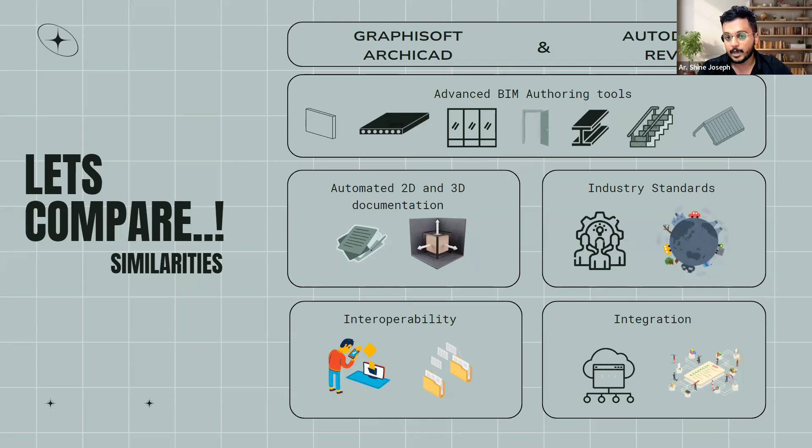Now the main part we have to look at when we select a tool is the differences between them. Now we have two options here: one is Archicad and Revit.

First, we will look at the difference in developer. One is by Graphisoft, that is Archicad. Then there is Revit, which is by Autodesk. Now both tools are actually developed by two different companies in two different locations. Even the purpose would have been different. And if you know, there are some softwares provided by both Graphisoft and Autodesk, so we will know how it functions and how it talks to one another.

In the same way, if you look at another aspect of comparison, Archicad is mainly famous for its user-friendly interface because it is designed by architects. When it comes to Revit, it has a strict way of following, and you have certain methods you have to follow if you are doing modeling within Revit. But it has a composed interface in terms of the technicality.

From an architectural perspective, you might look for something that is very intuitive. Archicad allows you to work on both axonometry and perspective. But with Revit, the main workflow is within an axonometric display when we look at the 3D part. You could still achieve perspective through camera, but it is a longer process. That's why many people chose SketchUp over other software - the ability to move around and inside the model, because perspective view allows you to do that. Archicad also does the same, making it much easier compared to other software.

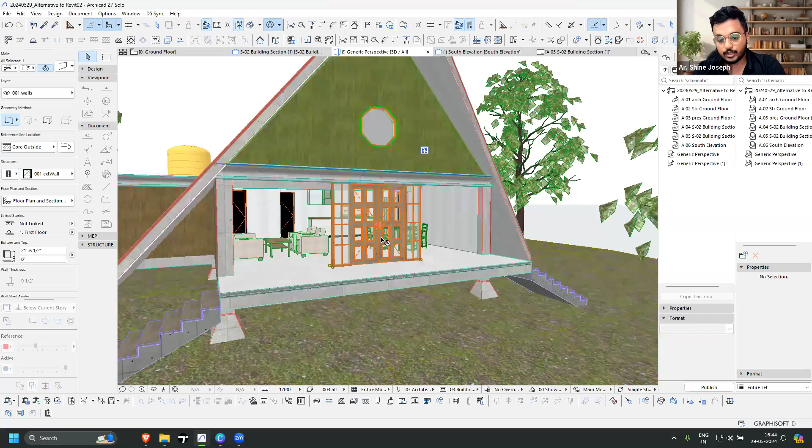Now what I'm going to do is make the front wall, below the beam, using curtain wall tools. We can lift the wall up by changing the base to the first floor so it remains at that level. Now we will build a curtain wall, remove the door, and start fresh from here.

The curtain wall tool in Archicad is a separate tool compared to Revit. Revit works with one single wall component—you have normal walls or stacked walls, and you also work with curtain walls. Here we have a separate tool altogether for curtain wall.

Let's see the settings. There are some categories or hierarchy it comes with. The first is the major settings, or global settings, where you fit the heights and decide what offset you want to build it with. I'm going for a 3.5-inch offset from the home story, considering the floor is going to be that thickness for the floor finish.

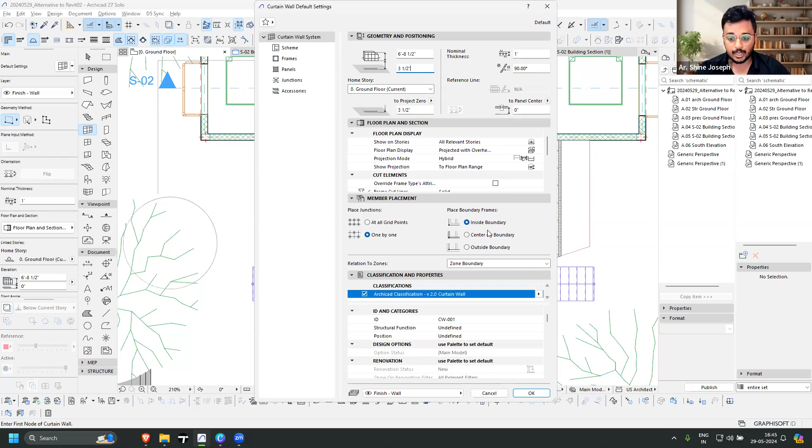There are also additional options, telling which drafting line you want to refer to, and what kind of framing you want to focus on. The most important part here is the scheme. How scheme works in Archicad is that there could be a pattern which can be repeated—that's what a scheme is.

You can create any type of scheme. Right now I'm using a scheme with a 2.5 inch width, and also 6 inches and 8.5 inches height as a pattern I'm creating. This pattern could also be a checkered pattern, a honeycomb pattern, or a random pattern—you could create any pattern you want to repeat. Archicad has that level of detail you can give.

But with software like Revit, it has a strict way of following, which creates a little bit of difficulty in terms of final achievement. So here it's easier when you create these elements. I'll also make sure the pattern is starting from the center—that's something you can customize here if you need any offset or something.

There are multiple options for achieving each element in a curtain wall. The first element is the frames. Frame is categorized into corner frames, boundary frames, mullion frames, and transom. When you click on any of them, it gives you a preview of the element you're looking at, along with the member size, dimensions, or profile you're following.

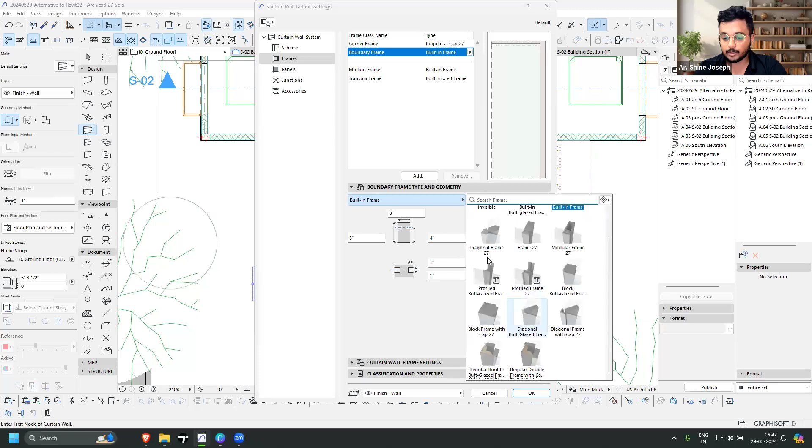Here I'm taking the boundary frame, going for a smaller size, probably 5 inches, with width of 3 inches, and this I'll put at 4 inches. You can see the preview of the member profile changing based on the numbers I'm adjusting. I can also look for different profiles already built in, or completely customize and create one—but this is usually the profile we use.

Now both the mullions I'll follow the same way—I'll go for a smaller size, making it 4 inches and 3 inches here, and control this as well at 2 inches. You can see the moment I change something, it gives you the preview and you'll be able to identify if there are any issues in the model.

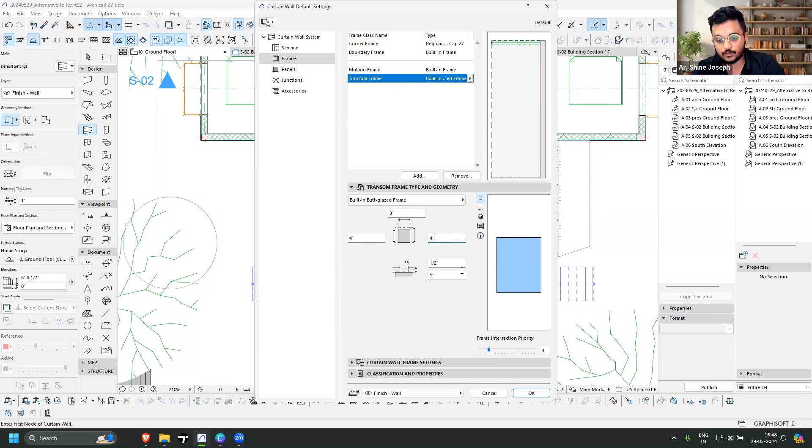I can also work on the transom with the same dimensions—4 inches, 3 inches, and this also I could make 4 inches, depending on what dimension and how it has to join with the rest of the elements. So here we do the setup, then we move to the panel.

So we first did the scheme, then we came to the frames, then we are going to the panel. Right now this panel, if I need it to be glass, I could customize between the main panel and distinct panel, and then I can change. Right now this is the main panel and it is using glass. I could also override the material here and customize a lot of material profiles within this.

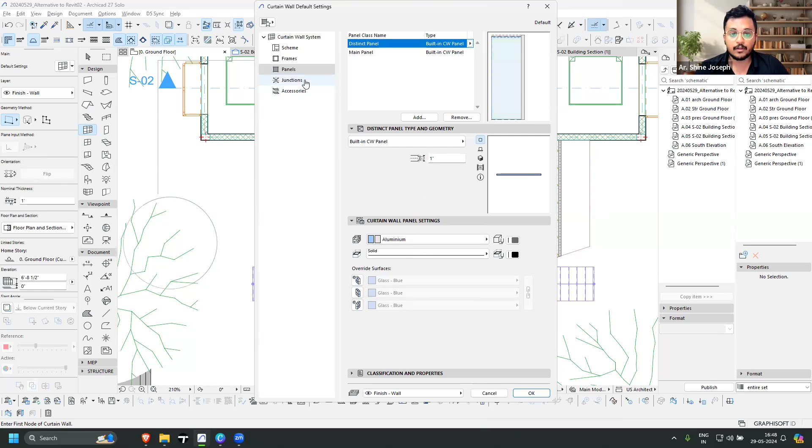We're not going to the junction and accessories. That is something that we can probably see later.

So we will give those properties the same as it is, and we will look at the ground floor and we will draft. Now, when I draft, you can see the preview of how the element is going to be once I do the model. Once I click here, you get the same profile, same panels, and the details.

If I need to have some kind of movement or values to be added, either manually you can do it within Archicad here, or you can adjust the sizes altogether in the main settings. So I just created a curtain wall with the center as the member starting, which I have given in this. And if I get to 3D, you can see the curtain wall has been added.

You could achieve any panel here. That is one of the greater advantages when it comes to working with Archicad.

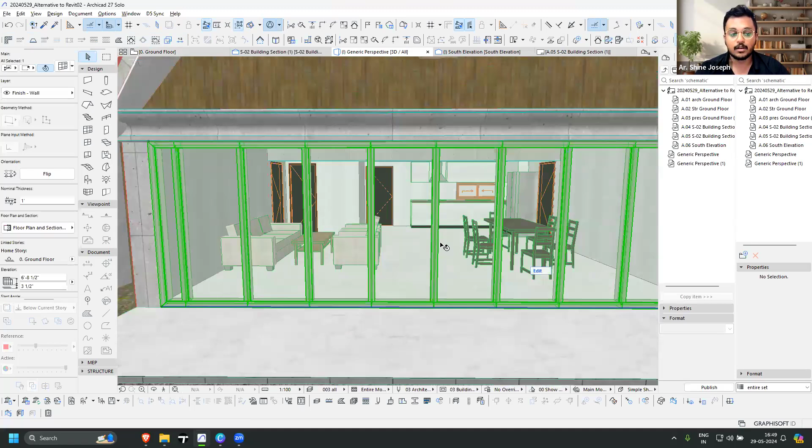Now, if I wanted to edit and customize it globally, if I change, the whole element is going to be affected. But individually means I could just go to the edit mode, which will give you more control. Like if you don't want to see the environment, I can hide them. I can also hide the accessories, junctions, or panels. So all these options are within Archicad for you to work around.

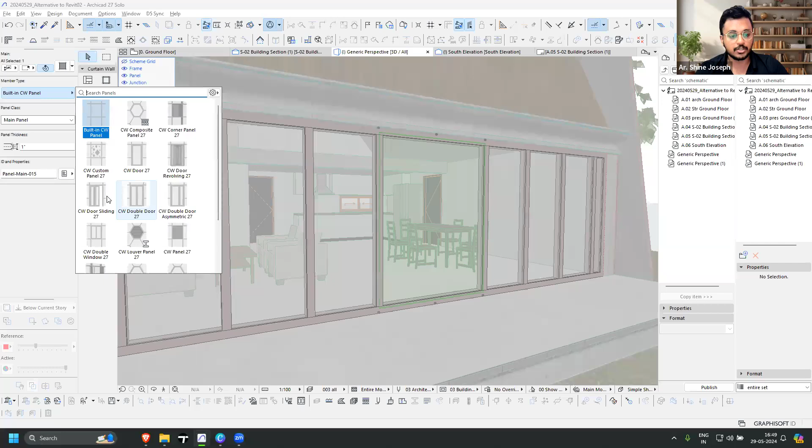So I'll just delete this element and convert this particular slab just by going to the settings and change it to a sliding door. So there are some options here. I'm going for a sliding door, and now you can see just by changing that, the element has become a simple double door. It's not taking any time for me to do any customization. It's all in your hand right away in the interface.

Again, I'm going to the door settings. Within the door setting, there are some options I can work with. I can also customize the panel size and visualize in 3D how it is changing. So if I give it only like a 1 inch thickness, it is going to show how it is going to be. So you could explore some of these things looking into these elements.

And yeah, this is what we have. So I added a door as well. One great advantage is that these elements usually come with certain parametric properties. So here, opening is one of the properties that it has. So I could show in terms of representation that the door could be open within this.

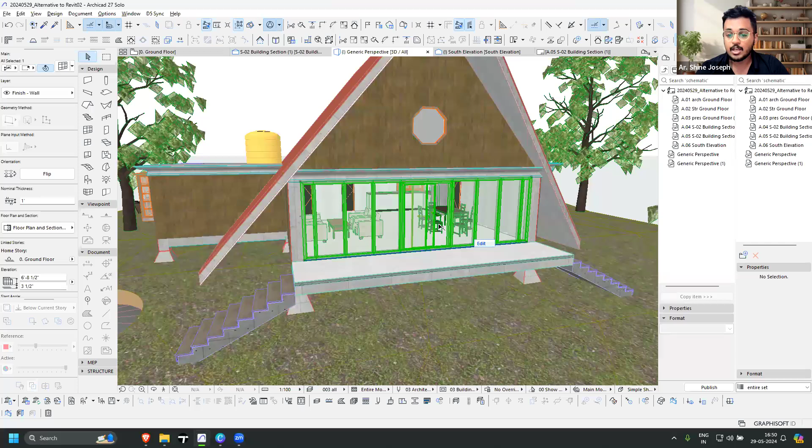So curtain wall in this manner can go to great extent to create any type of thing, not just vertically. You can also have a horizontal element as well. So if I walk in, probably in the upper floor, if I want something like a ceiling pattern, that's what I'm looking at. In that case I could construct a curtain wall with a specific panel, and I can avoid all the members and create something interesting as well.

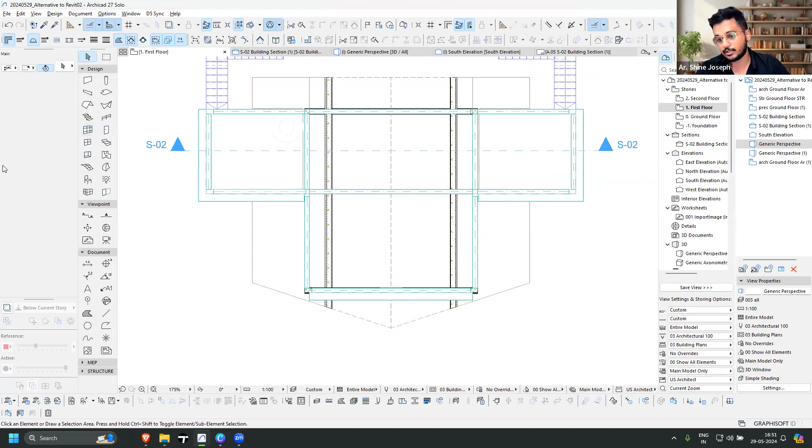So there are so many options that this curtain wall lets you do. Not just this rectangular profile, you can also build it completely to this particular profile as well. So curtain wall gives you complete control, thinking that you are an architect, you should have the freedom of modeling, and the tool is in your hand to create.

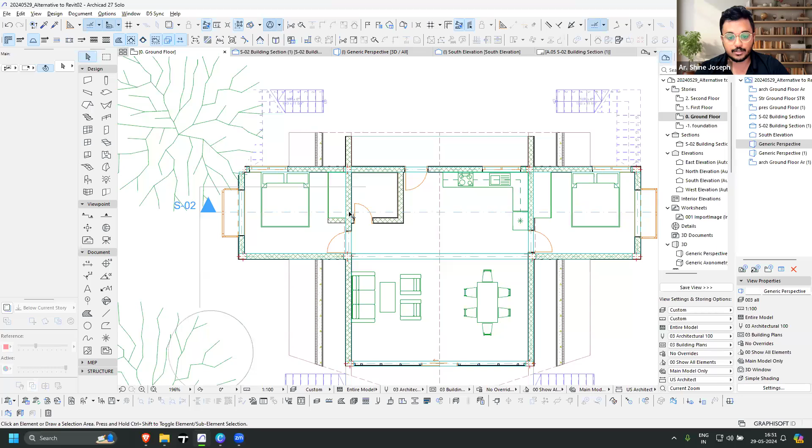Now moving forward, we will look at the MEP part of it, for which what I would showcase is, okay, we are going to do it for this particular toilet, and we are going to put a WC and then take a pipe outside to this particular area.

One of the methods that we have is we could access these MEP tools under the design tools. So there is MEP engineering tools. If you look at, there is ductwork, pipe work, and cabling work. We are looking at pipe work and specifically the pipe route.

I have customized my interface in a way where I have it here under MEP, all the tools that are required. So the first thing is I need to put a WC. So I could use an equipment tool itself to add that. And you can see there are some WCs.

If I want to look at tap or sink, I have all the things already, so I'm going for WC. I'll take this one right now, and then I can specify the element that I'm looking at. This is a 3D preview to be floor mounted or wall mounted, so I can change those details.

Also, the effluent right now is in the back. If I want it on the floor, I can just change this, and that property is going to be updated in the 3D. You can also work on the systems and all these details within here.

Moving forward, all the MEP elements will have a section separately for connections. Right now there is a water connection using a 1.5 inch pipe. For a wastewater connection, that is right now 4.5 inch. If I wanted to change that, I can directly change it here and then continue the modeling later.

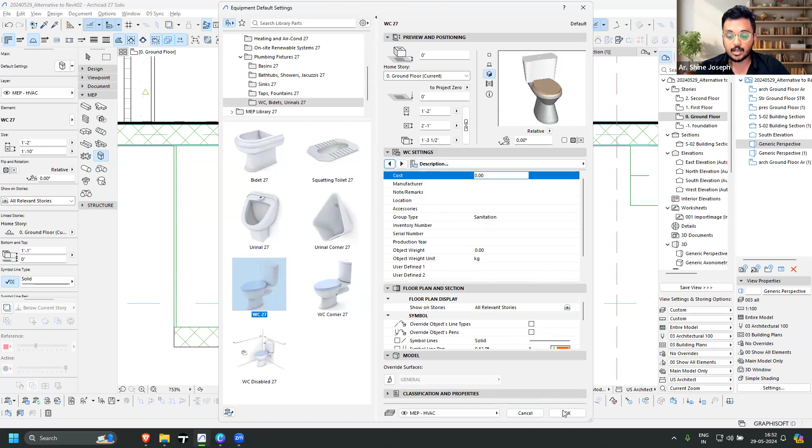So I will keep the settings how it is, and then I will place it to the center of this, and I could also just move it in a bit and place it. It's up to us how we want to do the modeling and what technicalities are required. The pipe you are seeing is the inlet pipe that you will be able to work on. Let's see it in 3D, but I wanted to just focus on this.

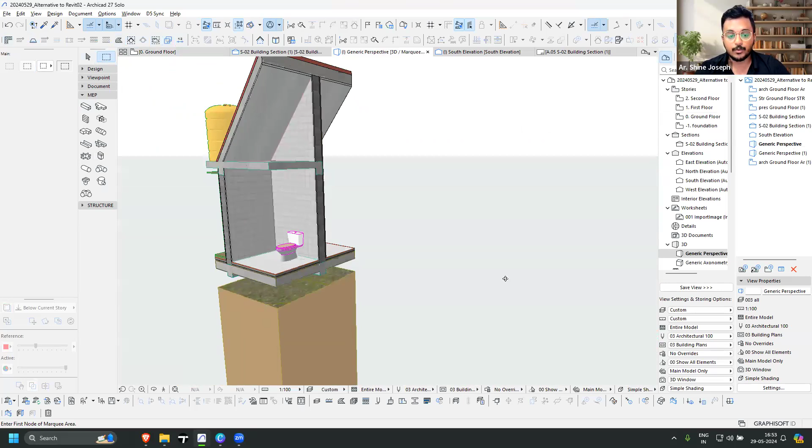One of the tools Archicad has that is really powerful is the marquee tool. If I just take a typical section like this, and then put F5, that shows 3D, it is going to give me a cut section throughout the model, which could be used even for presentation as well. So we have this.

You can visualize it much better. Let's say this particular slab, I don't want to hide it, I want it in terms of layered or wireframe mode. So you could go for the layer settings, which is already there in Archicad. You can assign elements to some of the layers, and you can also create layers and layer combinations. I'm going to change the slab to be wireframe, just by clicking once, and it's going to change all the slab to be in wireframe mode.

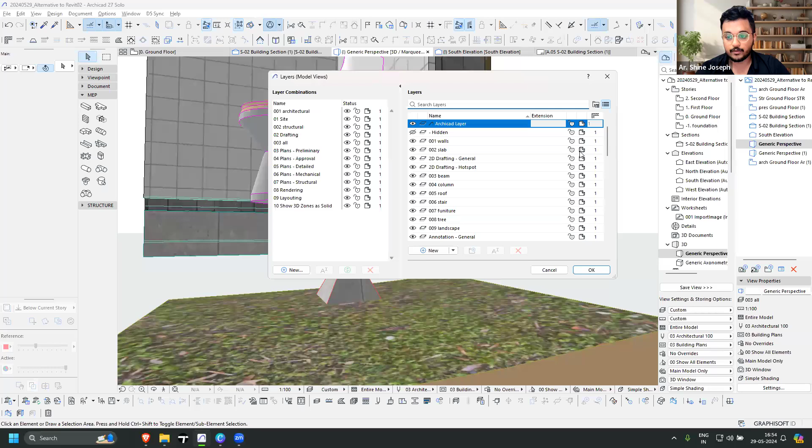Now you can see this pipe which is coming out. I could just stretch it as well and build it till right below the beam that we have. If I want, I can get back to our main element and keep the wall as wireframe, and the slab I can change back. Now you'll see all the walls to be in wireframe mode. So yeah, you could do a lot of changes here as well.

So this is the pipe that is getting the water into this. I could also extend that outside and do it. There are so many options that it lets you work with in the initial part of it. Now moving towards the pipe work, when we work with MEP, there are certain systems that we have to build.

So these systems, let me just open the MEP systems. You can see there is a system for black water, cabling, cold water supply, cooling, exhaust air. All these things you're seeing right now are different MEP systems. If you notice black water, I have already created a system here.

You can just click new and set the property, and assign it to any specific thing. If you wanted to use that system for duct work, you can activate it here, or for pipe work. So I'm giving it for pipe work. And if you also notice, there is an option to customize the fill.

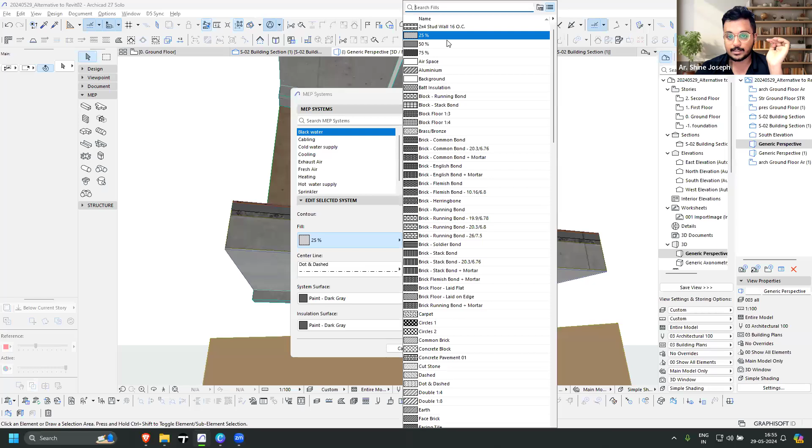This is mainly for how you want it to be visualized in your drawings, and you can customize the line type and also what color you want to use. And when it comes to 3D, you can custom create a specific texture to showcase all the pipes in that color. Not necessary, but it would be good for identifying or separating them in your model.

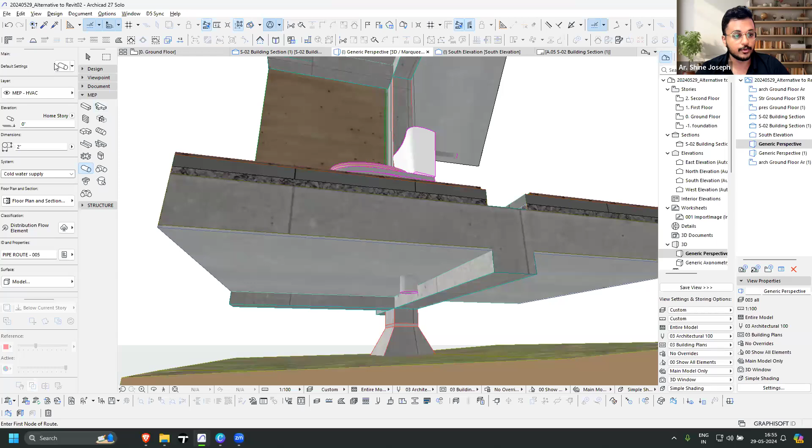So once the settings are done, what I will be doing is take the tool, that is the pipe route tool that I'm using. I can go to the setting and assign them to the right layer. I'm going to keep it to plumbing, considering that is what I want. The system right now is using cold water supply; I could change that to black water, and go to the segment. Right now we are going for a 4-inch pipe for the exit, so you can customize it completely here.

If I go to pipe settings, I could remove the insulation on the pipe. I can also work on some of the other properties. This is something you can explore in terms of nodes, where the creation of junctions happens. Right now I'm working on this pipe bend. I could remove the insulation and work on the dimensions and all these aspects. So you have a lot of parametric properties built into this.

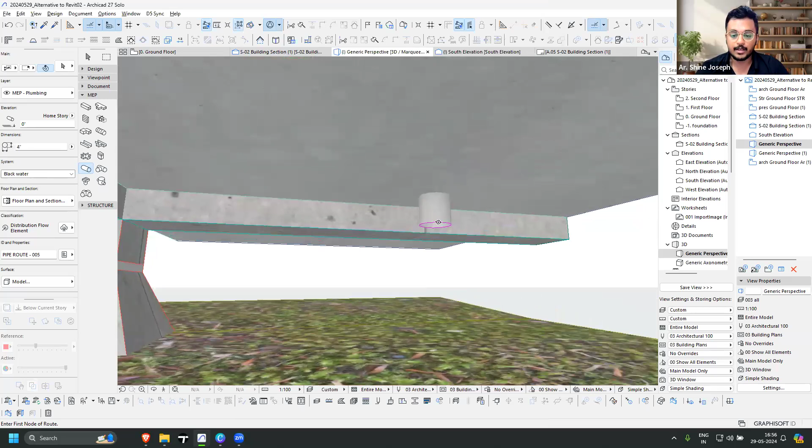Once these properties are set, we just click OK and start the pipe work. Just like how we do a normal typical drafting, we are going to do the same thing in 3D. The moment I come close to this pipe, it is going to snap, and now I can do the model. So I'm just making a pipe straight down, and let's say I go in this direction, and I'll click the same point again. You will be able to see I created this pipe work.

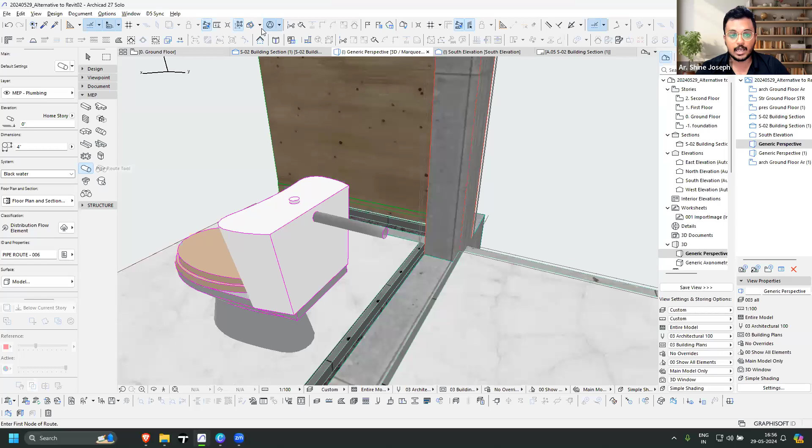In the same way, if I wanted to do it from here, I would go to the pipe work again and change the main settings. Instead, I could just take cold water supply and then customize the pipe dimension here. You can also change the dimension separately, which I'll show you right after this. So I'm just going for 2-inch, and let's see. You can see right now the pipe is coming here, and I need to go up.

I could just snap in 3D as well, or preferably you could work on 2D also. So I'll just move straight up, and I'll stop it here. You can see this one, because we are using cold water supply, specifically that color has been given, and for black water I have given this color.

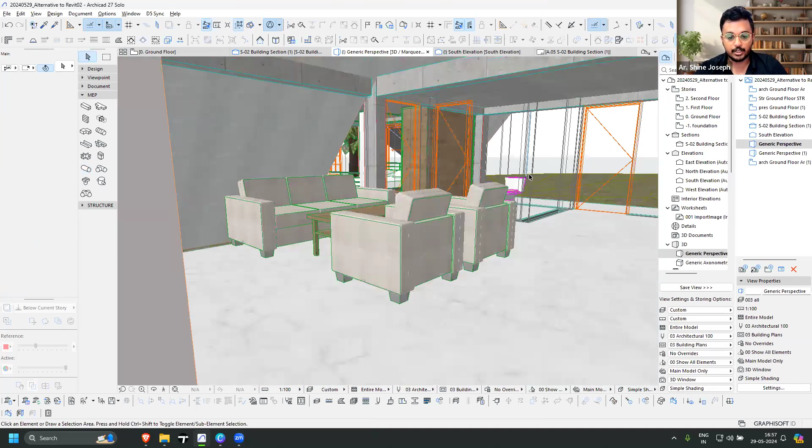So that's how easy it is to create 3D documentation here. Let me just visualize everything, and now we have this. The pipework that you're seeing is actually here behind the wall. If I come back to plan, I will see what is made visible to that element. If I go to one floor below the foundation part, I'll be able to see this.

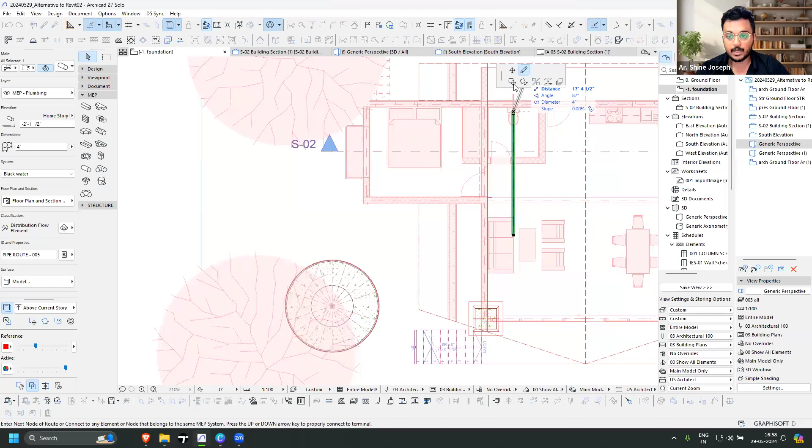Let me turn on the trace reference, visualizing the floor above, so now you can see what is happening above as well. Now I could do adjustment by moving this around. Let's say I want to continue that pipe till here, I could do that. Or if it has to be straight till here, and I want to take a turn, I could just continue the construction by clicking in the pet palette, and it will give you even these junctions.

If some other pipeline is coming from the kitchen, for example, I could just start a pipe and then come close to this point. It will detect the pipe, considering this is where it is joining. I can just click on that, and it will give you even the junction of those things.

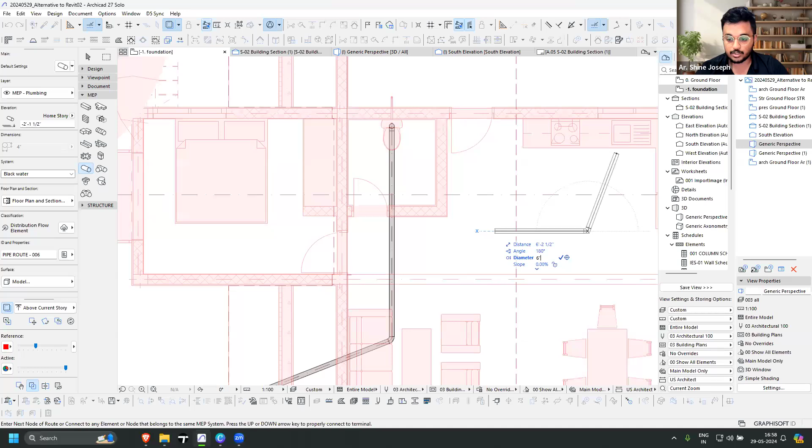If you want to change the pipe size, while doing it, I just change it in the context from 4 inches, if I go to 6 inches here, just to showcase, you can see the pipe and the junctions also updated according to that. So the work will be done by the system depending on what details you are giving to it.

There are also additional options like pipe accessory tools to work along with that. So if you want to add a check valve or butterfly valve, any type of valve we need, we could add it here. You can also import any other file types. For example, if you have a Revit MEP element, you can import it into this library and use it. That makes the workflow really easier if you are working towards an MEP modeling part.

So yeah, that's about the MEP part. I think the MEP part is clear. If you have any doubt, you can ask in the chat. We will move to the next part, that will be the structure.

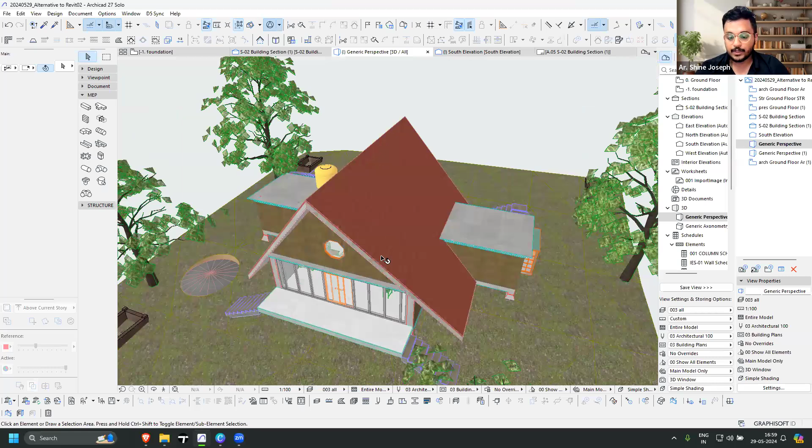If you noticed in the previous session, let me just get back the main model. We have given certain properties such as whether an element is load bearing or not. So for roofs, we have given, for walls, we have given it as non-load bearing. For columns, we gave it load bearing.

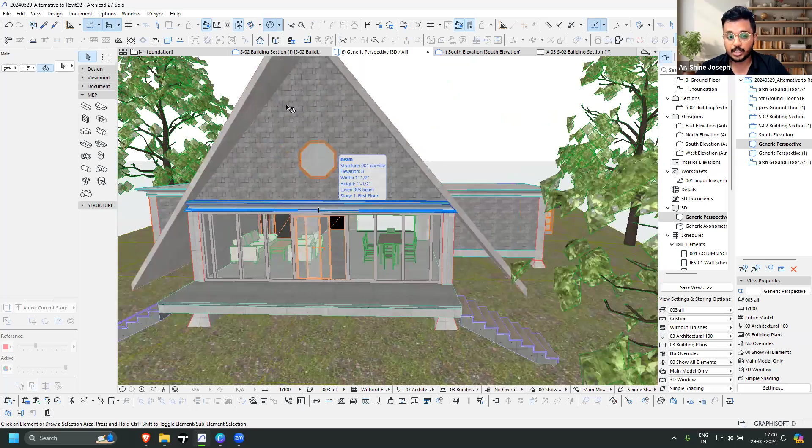So these properties are already given to the system, and once it is given, it is just a click away. Here under partial structure display, I could go through these options. Let me just go to without finish. You can see the layer that defines the finish layer is completely removed, and I'm seeing the main part of the structure.

If I go to the next thing, that is core only - the core part of the modeling model that I will be able to see. Next part, core of load bearing.

This is specifically the structural aspect, where now within the same model, I can visualize all the elements that are load bearing within the project, and on top of that, these are the core of these elements. So you'll be able to see all the beams, the slab, the roof structure that we added, also this slab and this column, the specific column that we designed. We will also be seeing the MEP because that is made part of this.

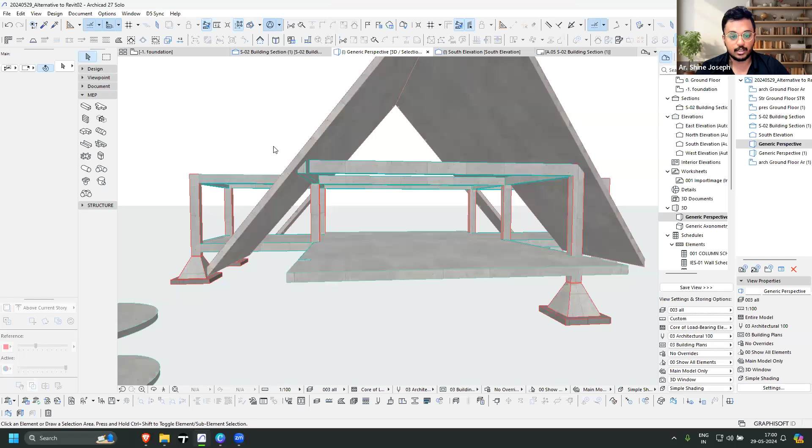If it is not required, you could hide it as well. So you can do hide selection that will remove it. So here I actually hid this element, let me get back. Hide selection - yeah. So this is just a structure display where you can have the primary conversation with your structural engineer directly from here by hiding all the unnecessary elements.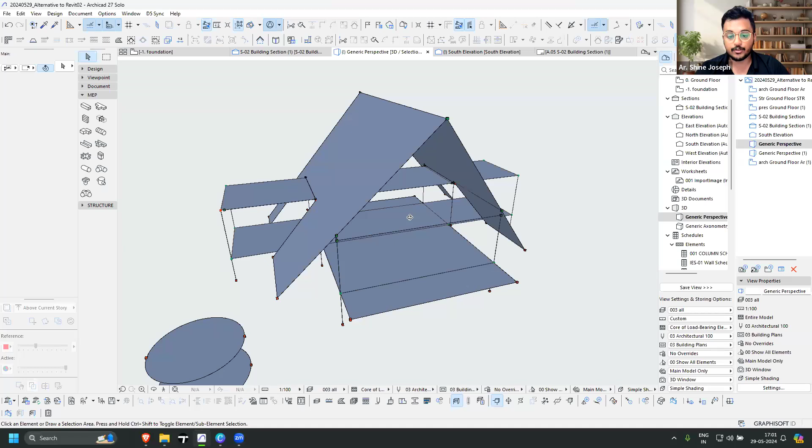But the next step would be visualizing it very close to how a structural engineer would approach. That is an option here called structural analytical model. Once it is active, it is going to showcase to you in terms of how a structural engineer would see. So you can see there is a red color and there is a green color. These green nodes, I can also work on the appearance of that by just turning on and turning off. Whatever is green are connected properly, and whatever is red are either cantilevering or not connected. And you can see some of the properties that are already here.

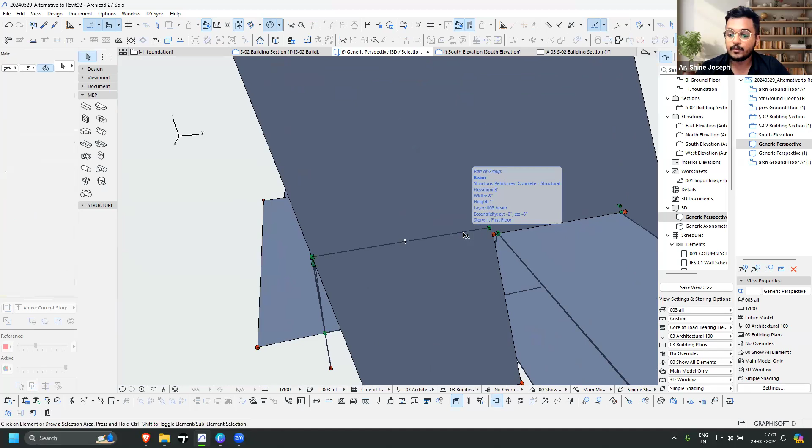So this kind of visuals, we will get even before sending the drawing to a structural engineer. So from an architect's perspective - okay, this junction right now is not a proper junction, it needs attention. This particular thing is telling me that, and it is cantilevering the beam going on in this place. So this information you are already getting in the model, so that before even you take a decision, you will be able to completely customize and make it a better model, then give it to the person to do the analysis. Again, there is one more step that you could do here.

Archicad has this option of creating this load mapping where you could have different types of uses and you can assign it to the zones. That is one. You can also create load cases. So right now there are some load cases here which can be used on applying it on top of any model. Or we have a structural tool, just like I mentioned before - we have structural engineering tools under structure which can be taken into our interface as well.

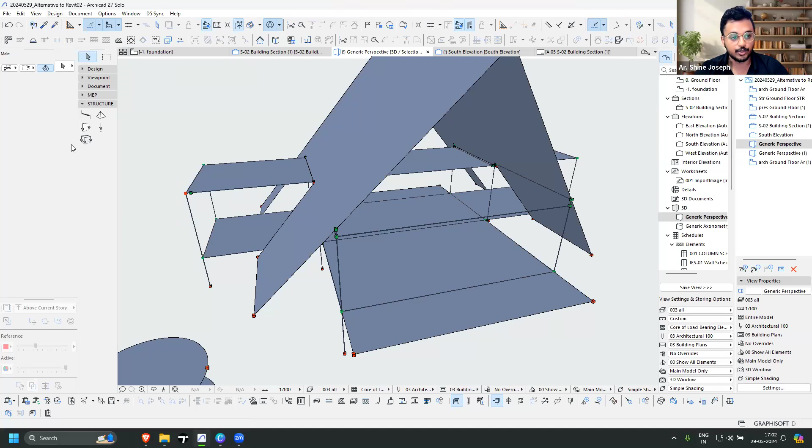So for example, let's say this is the horizontal element, we usually apply it as a planar load. So we could take this structural surface load, then go to the setting, take the load case that you are looking at. So I could use a dead load here, and then I can work on the load value. I'm not a structural engineer, so I'm not really familiar with most of the terms here, but I think this is clear enough to tell you how it works.

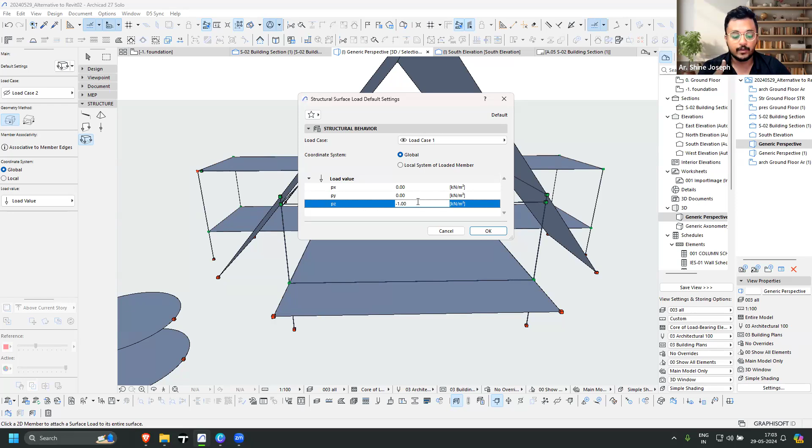And once, if you are a structural engineer and if you are using these properties on this, these elements will carry these properties before you put it into the 3D software. So you can export this as a SAF file or even an IFC file to transfer the data. So I'll just give okay. Now it will detect the horizontal planar elements. So you can see right now, once I click, this load will be assigned to these horizontal elements. So that is what you are seeing right now.

You could also work with some of the linear loads. So for that you also have some load cases and you can apply whether you want it to be uniform or a trapezoid type of load if it is changing. So for walls, usually we use this method and apply it on top of this. Now you can see this particular load is applied to these junctions. So you could get a lot done within Archicad itself.

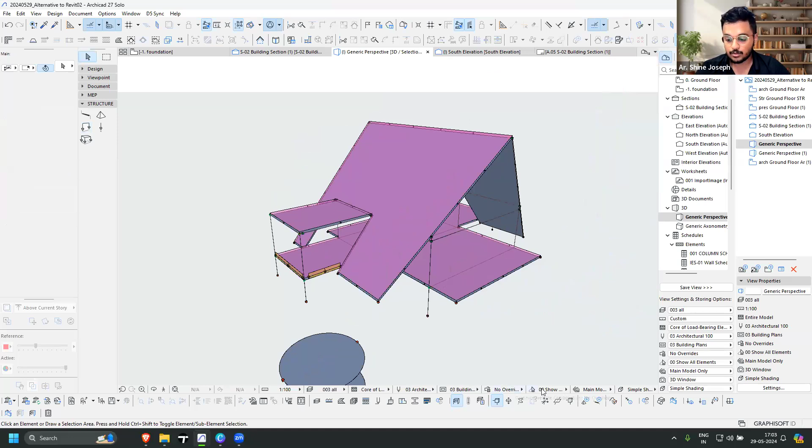It does not do analysis in the model, but it will give you the analytical model that can be shared with the structural software to do the work. So that is mainly about the Archicad structural aspect. But continuing on that - when we use the column tool or beam tool, not just a rectangular box or anything, you can also go for I-sections and details.

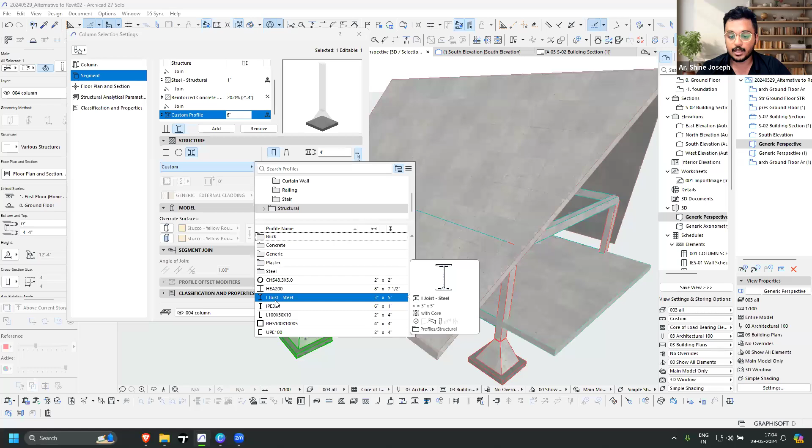There are structural profiles already built in. You can also create custom profiles, like how we did in the previous session for the cornices. You can create these custom profiles, any profile specifically used in your country, and import them as well. So not just rectangular elements, but also any shapes can be added while doing structural details.

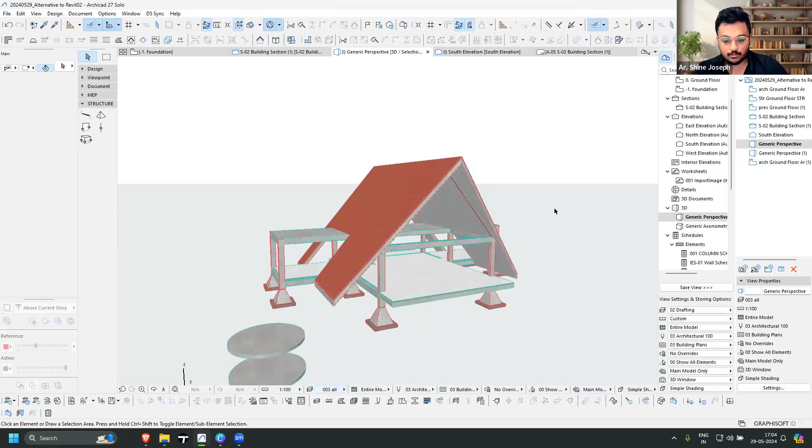Let me get to the whole model. We will move to the next stage, the model view option. Now let's say we've done the modeling part with some amount of work. Before you publish your drawings to the site, what we usually do is keep the level of detail increasing over time. That is what this model view option is about.

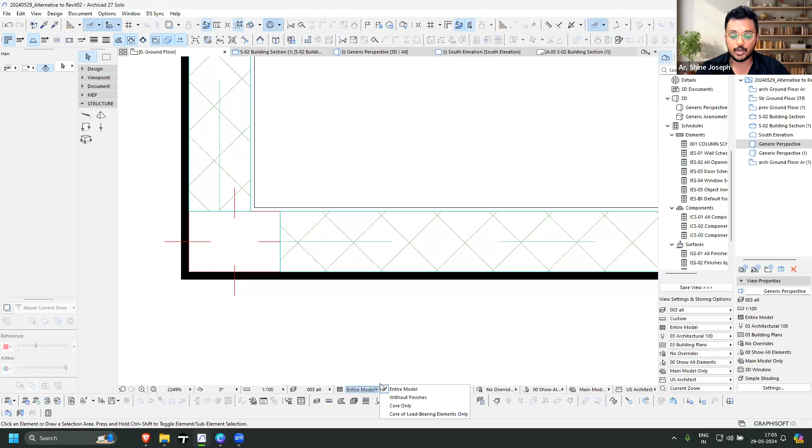For example, let's say I'm in this architectural or structural drawing. There are levels of detail. Right now in this model, I'm trying to achieve as close to reality as possible. But when I give it for construction, I don't need all these plastering layers when the stage is about the civil part of it. So we have two options. One is just going for 'without finishes', which gives me this directly.

But in other options, for example in this civil drawing, even though I can remove the finished part, I may not need the door to be visible in this drawing — I just need the opening to be seen. So in those cases, we use this model view option.

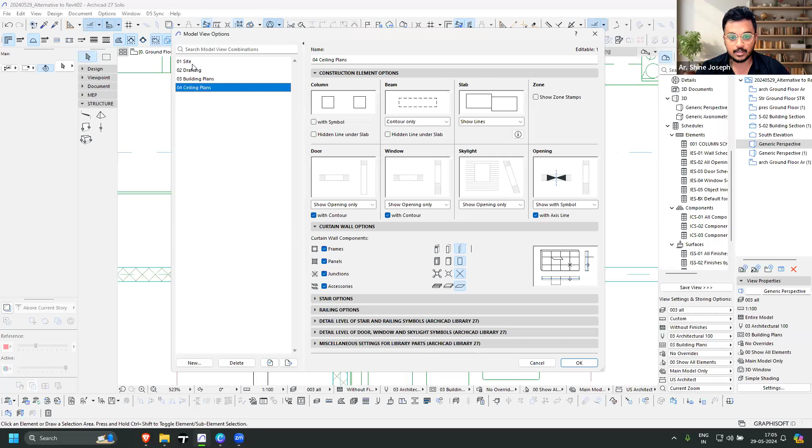This is within the interface. Right now we have 4 views already created, and we can also create completely new ones. If I look at site, the columns in this model have some kind of symbol, but in site view option you don't have that symbol. When it comes to beam, you will only see the center line, the axis, not the whole model of the beam. For slab, when it's two different slabs, even with same surfaces, they will not join in this case.

Moving to curtain wall, in site type you will not see completely detailed frames, just a line. Then going to drafting, the level of detail increases a step or two. Like this, you can customize architectural elements, structural elements, and elements such as stairs — how much level of detail you want to show in 3D and 2D. This can all be customized.

Now, how does it affect things? Right now we're in a drawing. If you change the model view option to site, you can see all the civil openings have been removed, giving you a drawing. This is something we do when working with CAD — this kind of drawing will be generated and you put the door.

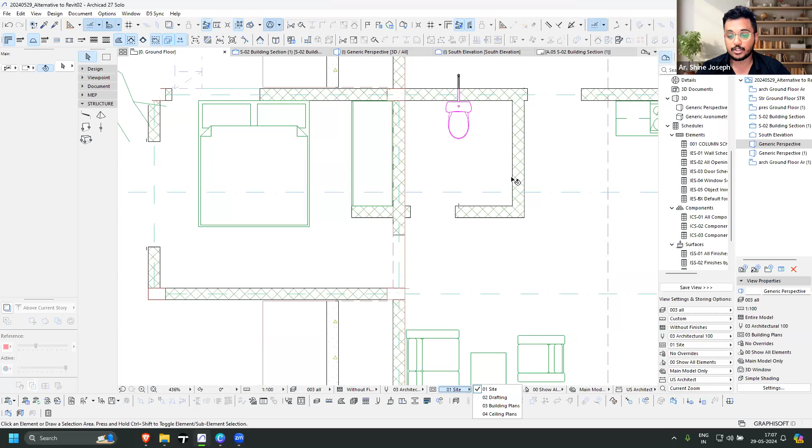You can also visualize the same effect on stairs, where you'll see only the lines and the walk line on top, with no other data. Next, if you want to give a little more detail to the site, you could go for drafting. Here you see an additional level of detail where the stair numbering is present.

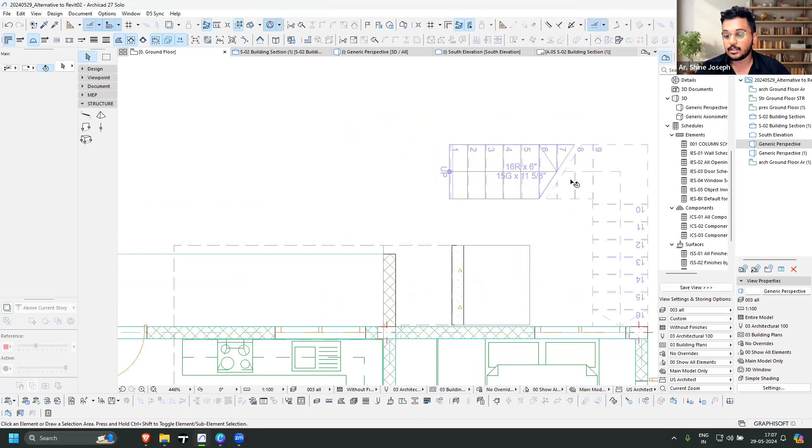Let's move to the next stage, building plans, where you'll even see the detail of the text, like 'up', and whatever content needs to be there — the detail has increased further. The same could be achieved in 3D as well.

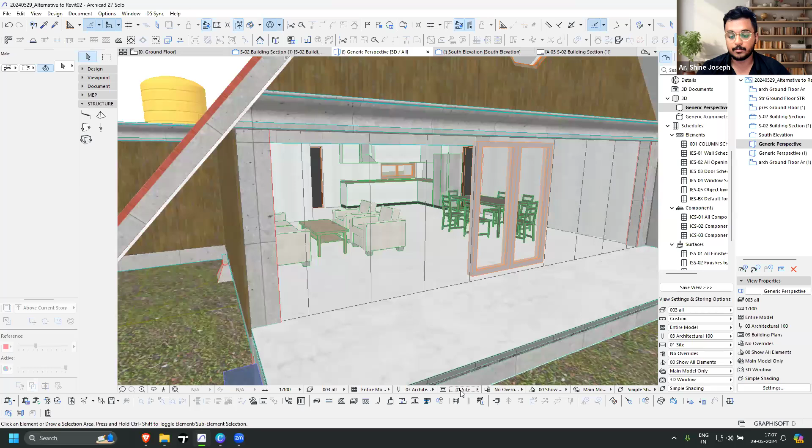If I'm using site, keep an eye on the curtain wall we just created — you can see only the panels, not the frames, because that option isn't activated; only the line is made visible. In drafting, I'm seeing additional level of detail. If I go for building, you can see even the detail on the door has changed — it was a closed door in drafting, but now it has become an open door, because in building plan that option is activated.

Moving towards ceiling plan, again there will be different level of detail, so you can achieve and custom create. Let's say phase 1, this is the level of detail I want; phase 2, this is the level of detail I want. So the model view option will let you work on completely the LOD part of the modeling and also documentation. So model view option mainly creates this.

Moving towards the next part of it, that is the graphic override. So graphic override is really important when it comes to quality assurance.

So how we usually do is, for this project, we are going to consider this model right now. I want to check it visually, which all are the structural analytical model, but I want every other element to be still there. So the rule is that all the load bearing structural elements which are there in this model, I want it to be visible in red color. And whatever is not load bearing and not structural, I want it to be in a transparent way, like glass. So this is the rule visually I am going to check.

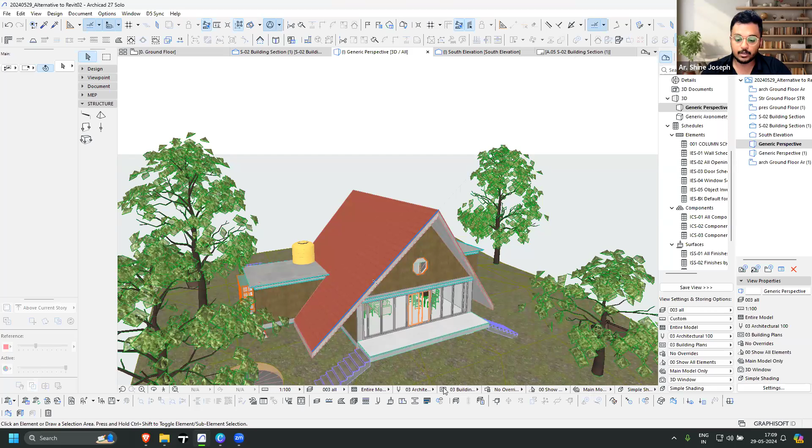So we have the graphic override here. In this, we can create a new combination. So we are going to name it 001 structural display.

Now the next step is to create certain rules and place it here. So we can go to this manage rule option where you can see there are some rules already here, like if I open the cut fill folder, under which all cut fills will be solid black, then all cut fills will be transparent. There are some options already provided for you, so what I'll be doing is creating completely new ones under a new section.

I'm going to give a new section that is going to be named as STR, under which I will start a new rule. So the rule is load bearing.

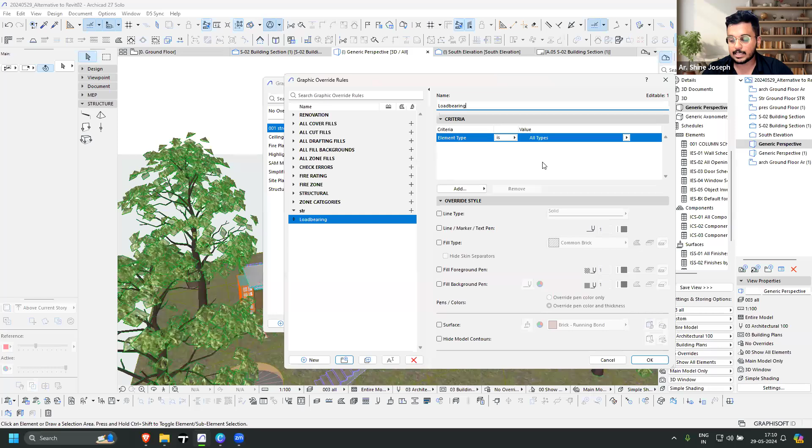Now I can use this rule and start customizing what is there in the content. So this was just the name of the rule. Now I'll create a criteria to select the element. So the criteria right now is all the 3D elements and all the elements that are load bearing. So element type is already in.

So I'm going to just take 3D types, all the 3D. Next criteria for selection is structural function, so let me just type function. I get structural function as a new property. Right now it is taking all the load bearing elements, so this particular criteria is going to give me all the load bearing elements which are 3D.

Now I want to change them. How do I want to change them? The surfaces I want it to be in a red color, so probably I'll just go for paint, and you can see there is some red color paint already. So I'll use this vermilion color in 3D. If you wanted to do in 2D, then you customize this aspect.

So you have this fill type where you can change the fill how you want it to be, and you can customize the color of it. So if I want it to be seen in red, I will just customize both the elements to be in red. You can even do a line marker detail, that also kind of helps you with how it is going to appear. Now this is the first set of rule.

Second set of rule, all the non-load bearing element. Instead of going through the same process, I can simply duplicate what is there and I'm going to just rename them as non-load bearing, and change the rule as all the elements that are not load bearing. So that is the rule that I'm creating. Only change would be this.

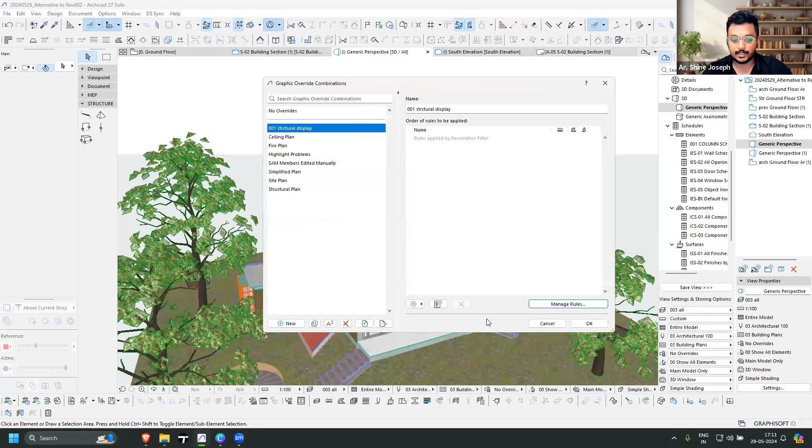I can take it as a transparent element so that we have glass as the material, and you can also change this as well to a light gray if I want to, in terms of seeing it in plan. So rules are set. Now we are assigning the rule, so I will just click here and set both the rules to apply to this element, give OK.

Now what you're seeing is this: in this model, whatever is red is load bearing and also there are 3D elements, structural elements. Whatever you are seeing in transparent are non-load bearing. You can do a lot of customization in this.

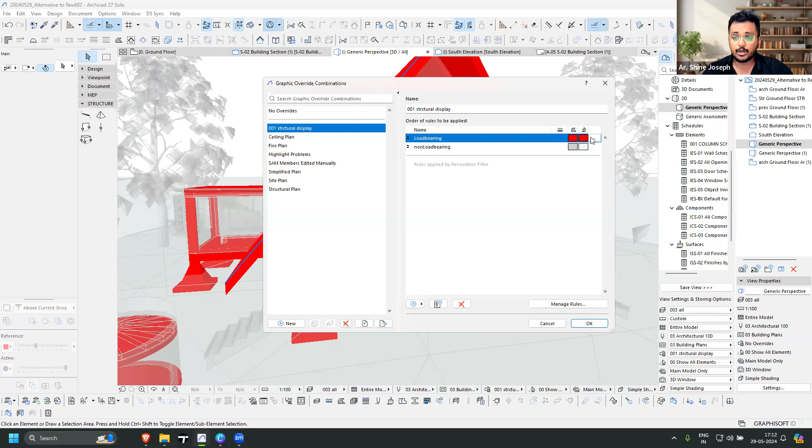If I wanted to specify only the columns that are load bearing, what I would do is I will just select that option of column. Now if I give OK, you can see all the other elements changed and only the columns are in red. So like this, you will be able to do a lot of customization within this model and completely make it the way you want it.

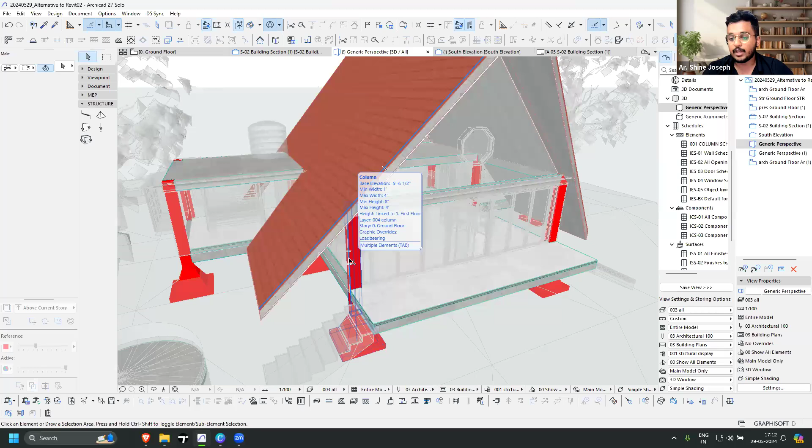So the graphic override is giving you the control of quality assurance. Now in practice, how do we do it? Let's say you have done a model and you have a template file. Within the template file, there are some checks you want to run.

First check is when you do the classification, there are load bearing elements, non-load bearing elements, and unclassified. So you can put a rule where all the unclassified elements are in red. You can have a different one where all the elements that are not at ground floor, or all elements that have some specific property, appear in a certain color, so you will know while you model if you make a mistake.

So when you run through the checks, there will be a list of checks that you can create in the template file. You could go through each of them, identify all the mistakes, and probably using the issue manager, find the issues and share it with them. So graphic override is a strong tool that we have in Archicad when it comes to control towards removing errors within the model. You can experiment with it. It is one of the powerful tools that we have.

Not just for this quality check, you can also create custom presentations by changing these properties both in 2D and 3D. Right now we are in 2D plan. Here also you can use the model view option. If I go to structural display, now you can see all the columns, all the load bearing columns are highlighted in red.

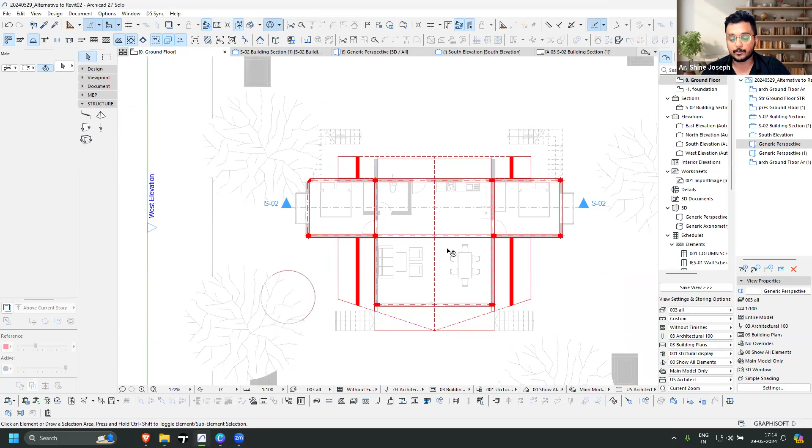If I had kept the rule towards all the 3D elements as load bearing, I could just change to 3D type. So not just the column, beams are also going to be shown in that specific color. So this is how we custom create graphic override to check the issues within the model, or create specific presentations within the model. It gives greater control towards element creation.

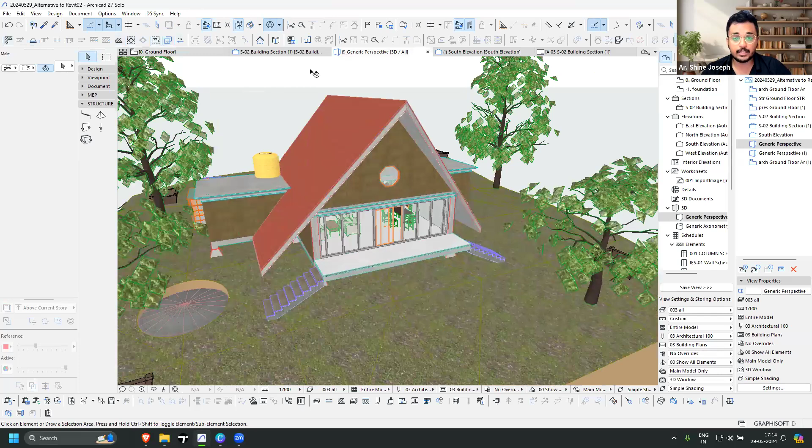And not just this, sometimes let's say we want to create drawings that are document specific. You could create 3D documents. I will get back to the model that we had. Let's say I want to showcase this column detail for structural aspect. You could use the power of the morph tool, the marquee tool itself, by selecting that detail you want to showcase. If I just put F5, it is going to highlight those elements and show you this detail.

So this is the detail I want to showcase in the drawing. I could create a 2D drawing by just taking a section and detail tool. I can also do this in a manner where I have the 3D detail, or I can do this and then convert that to a 3D document. So this is something really powerful.

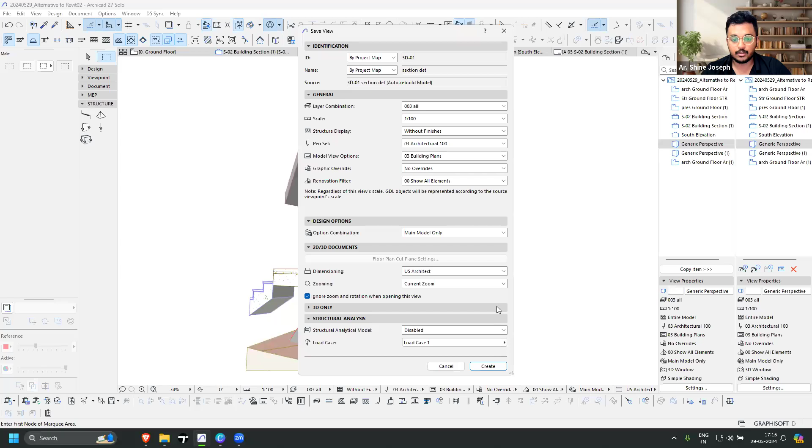So if it is a section detail, I could just name it section detail, and now that becomes part of your new view. Let me get to this and add it as a new drawing. Now we have here the one that we created. You could do documentation on this.

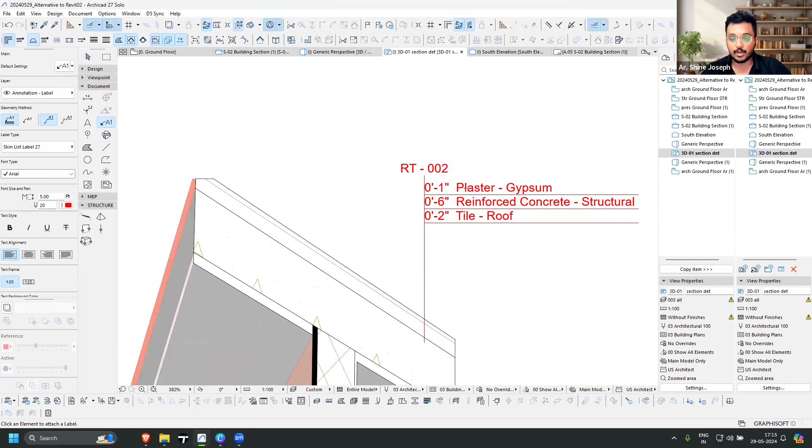So if you want any level of detail, right now it is without finishes. You can just go to entire model, and now it will show you the entire model with all the details that are required. So for documentation, if I use the label tool and go for the skin list option, if I click on this, it will give me the list of elements that are there. So there is 1-inch plaster, 6-inch reinforced concrete, a tile on the roof, and that is also in order. I don't have to type it anymore.

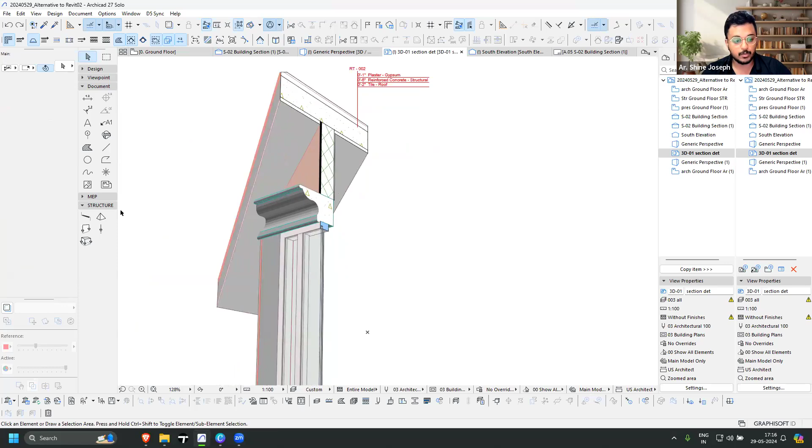If I want it for this particular element, it will give me whatever setting has been placed for that. So it's plaster, gypsum plaster, concrete block, and this. You could customize how you want the annotation to be. You could do a lot of work within this and make it much better. You can also add the dimensioning tool and work with this, just clicking on points to create the dimensions.

So Archicad lets you work completely in terms of creating the model, and also documentation, to a great extent. This is an architect's language. If you look at this element, it is not unfamiliar to architects. So we create drawings like this to communicate better with all the people we have to deal with, such as the people on site, the clients, and others.

So for all the presentations, you could also control the style of this presentation. There are so many things you can completely work on. Even if you want to add a shadow to an object, you could control it here. If you want to see the texture, the surface fills, and change how it appears, you can control it here.

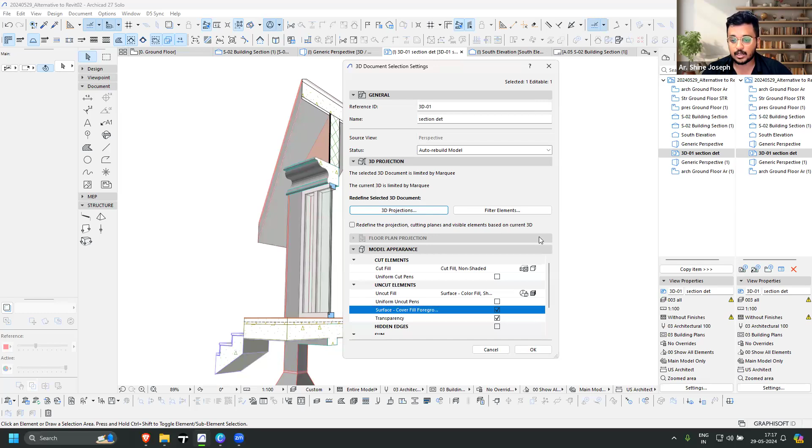Shadow, all these things are within this. And if you want to even work on the 3D projection settings, you could do that so that it will make it a little more different than how we are seeing like in a perspective view. So 3D documentation is something that is really powerful when it comes to ArchiCAD.

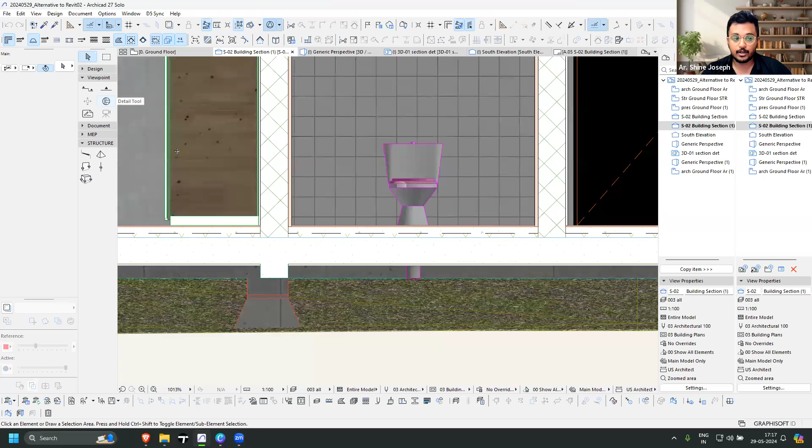It will give you complete control when it comes to an architect's usage. You could also create 2D details. So for example, what I created there, I can just use this detail. Let's say I wanted to use it for documentation. So under viewport, you have a tool specifically called the detail tool, which can be used to create this kind of detail, however many you want.

It will also add to your navigator. And if I just open that, you can see the documentation is here. I could create it as a view or multiple views if I need to. Now this will become part of my detail.

And I could add the same thing that we did, the documentation tool, all the dimensions required. I could place them here as well instead of doing it in the main section. Now that becomes part of this.

Again, if I want this also to be added into my drawing, we could just go to the layout. Because we have already one master layout, I can simply just do a drag and drop of that to create a sheet. So we had a 3D section that we created. I will just drag and drop into this, which will create an automatic sheet.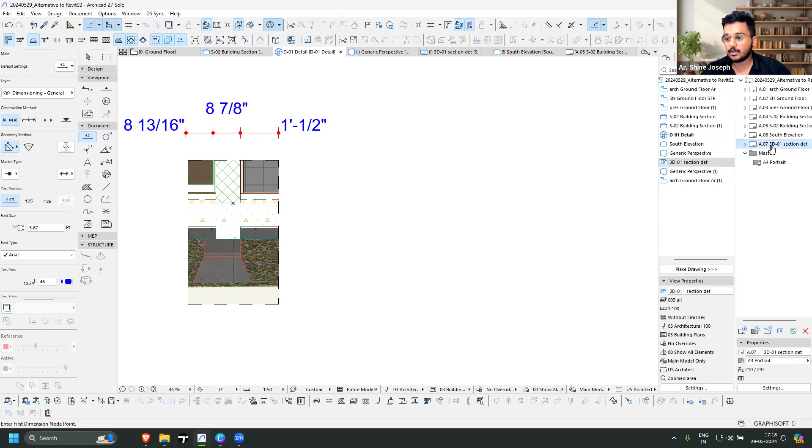Now I just have to do a change of scale. Probably that would be a custom scale of, I wanted 1:50. And then I can arrange the view and tell, okay, I need only this much of the 3D view. If I want to add additional reference of the specific detail that I created, I could just do again a drag and drop.

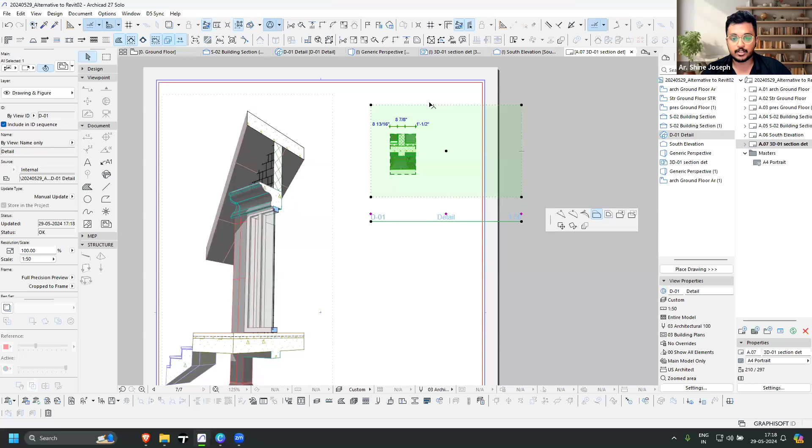That's it, it will become part of the drawing. This also I can customize. So however many you want, you can add, and make your documentation just by doing like 2 minutes or 3 minutes of work. That is all what ArchiCAD lets you give, that is the amount of detail that you can give within a short period of time using ArchiCAD.

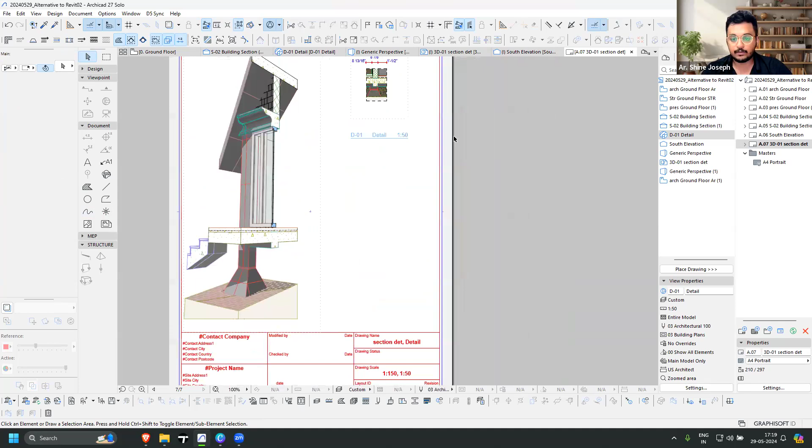So you can see these details, and it also gives the drawing name. So there is a section detail and also detail. Two drawings imported, both are already there, and both are in different scale. It will show you here as well. So making lesser mistakes, there is almost no mistake, I would say, unless it's a human error that you're looking at. Documentation wise, you have complete control on this.

Even right now, I just identified, okay, this is not the ideal way of ending the stair. I want it to be something else. You have the support connection, which you can look at when we are doing the ends. So under flight, if I just change the support connection to be horizontal, for example, just to showcase.

So something like this, if I take, it is going to use that property and build it for you. And then I can just give that dy value of that small amount of offset that is required, that is 1.5 inch. If I add it here, it becomes a better drawing as well.

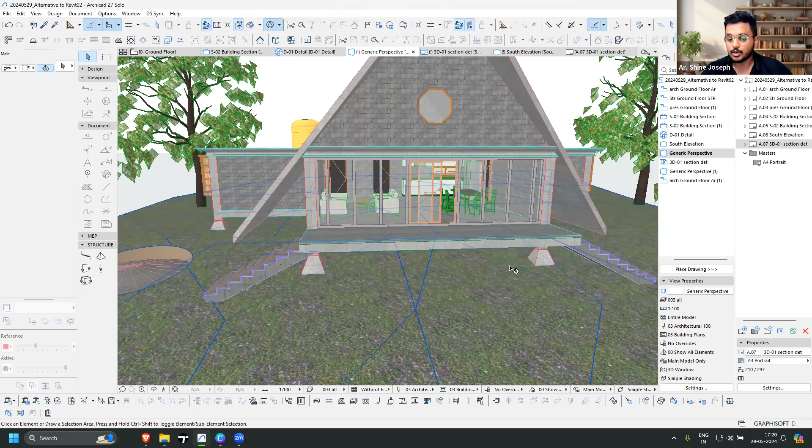So these are the things that give a step up when we compare to most of the BIM software around. The main thing is that this is an architect's tool. You can have complete control on how it visualizes and also how we work on it, how you can customize each and every aspect of ArchiCAD elements. And there isn't any difficult way in ArchiCAD. It's all easy to understand, easy to learn type of method within this. So the learning curve is very small, so you don't have to worry about learning specific terms or terminologies. It's very handy because most of the thing is like, if you notice, it gives a graphical symbol for you to work on it.

Now that is about today's presentation. I will just get back to our quiz.

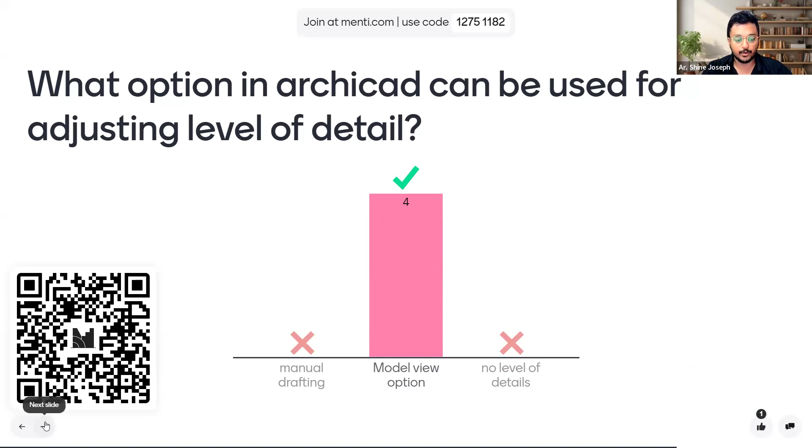What option in Archicad can be used for adjusting level of detail? We have explored the tools - like I mentioned, there are many tools. One of the tools already there is going to help in creating this. Yes, the model view option is the one we'll be using to create it. Good to hear that all of you are understanding the concept easily.

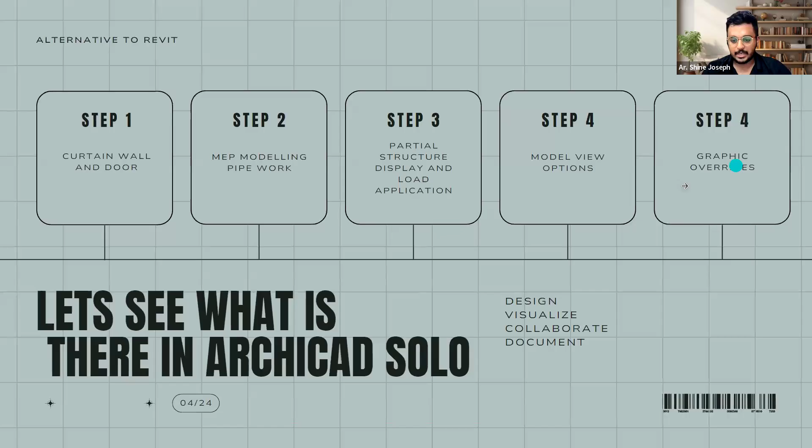Meanwhile I will take the doubts that are there. There is a question from Abhishek. Hi Abhishek - I was working on a residential project, tried using Archicad, had some doubts: one, can we add plastering to beams? And can we add metal grills to the windows?

Okay, so there are two things, like I was mentioning, when it comes to doing the customization part. The first is plastering of beams - you can do it, there are different methods where we create this. In the second session, I spoke about the profile manager, so using the profile manager you can create a beam with plastering. That is one way of doing it.

I'll just show two basic options that we have. One is if you use a beam here, there is an option to use a veneer - you can override the surfaces which are here. If I activate it, you will be able to add that particular paint - it's more like painting part of it. But the best option I would consider is using the profile manager.

So you could go to the profile manager, which is here, and then create new for that specific beam you are looking at. If I'm using a beam, I'll use that, and let me just create it under profiles. Here you can see there is already something.

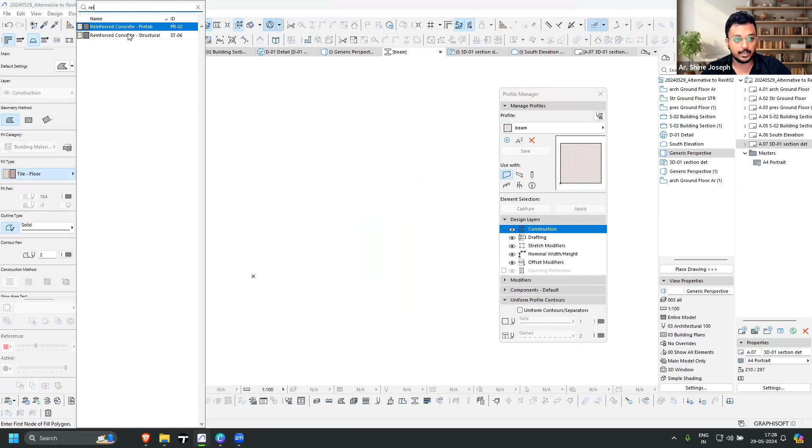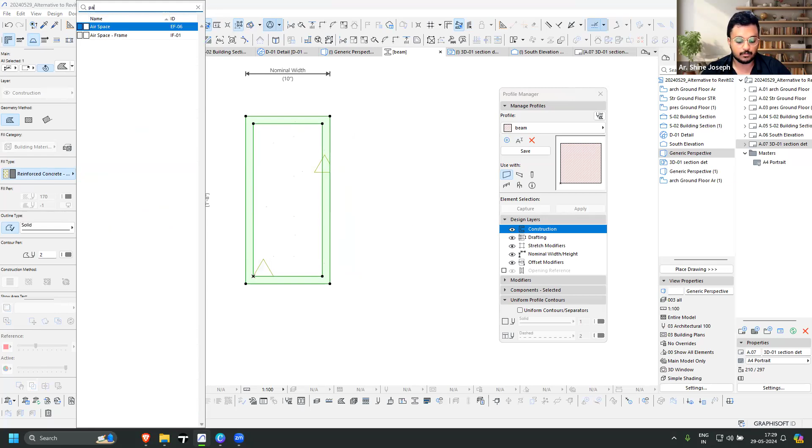Now if I want, I could just add the thickness of the plaster, that would be with another element. So I'll just choose a 1 inch plaster, and make sure there are 2 layers, and this layer I can add the plastering material. So if you're putting concrete or whatever material, let me just put gypsum itself, so plaster gypsum. You can see there are 2 layers right now.

I'll just save it and make sure I assign the objects to the beam itself. So now this is going to be the beam, and you can control the location of the beam. Right now it uses this point, which is not ideal. You can use it probably on this corner point, but again it's up to you where you want the plaster. You just make sure you add it here in this profile, and you could save it.

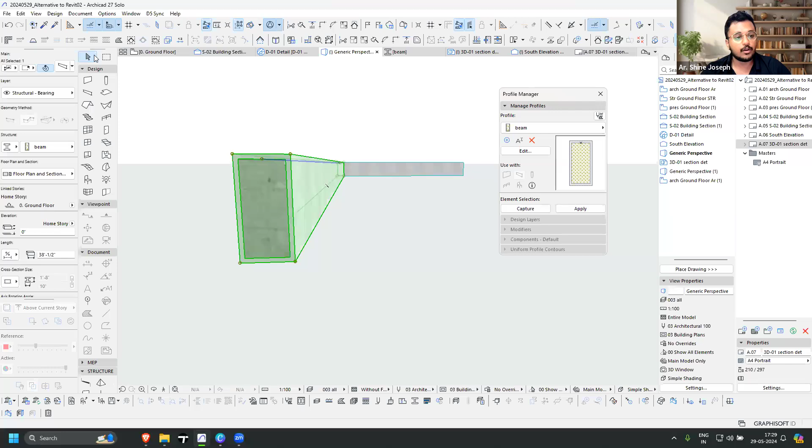Next time when I use the beam, I take the beam tool, and in the profile manager - last time we worked with the cornice, here we will be going with the beam - and I can just draw the beam which we did. So if I just put F5 and then focus onto that, you will be able to add that plastering layer to it. You could have a lot of control also by using the tapering option, and then control the thickness of it. Also in the profile manager, you can change the parametric properties as well.

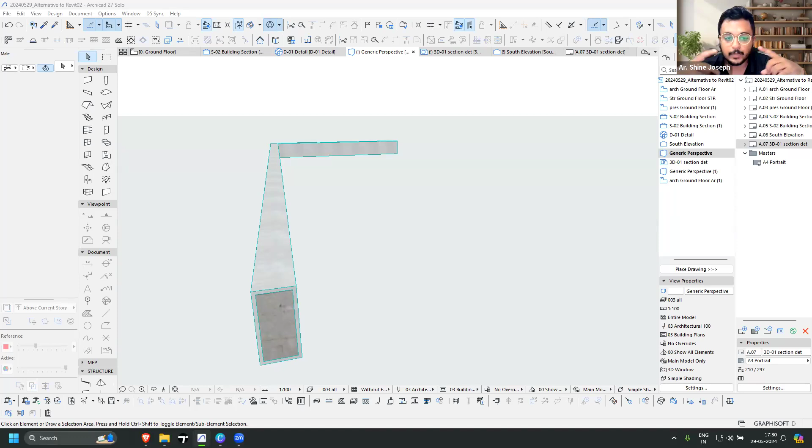So the next part of the question, can we add metal grills to the window? Right now, from what I know, we don't directly add grills into the model, but what you can do is use the morph tool to create the model of the grill, just like how we do in SketchUp, or even customize the complete window as a new model using slabs or walls or the morph tool. Any tool you can use to customize the whole window with the grill and then save it as an Archicad window. So there are 2 methods to create this.